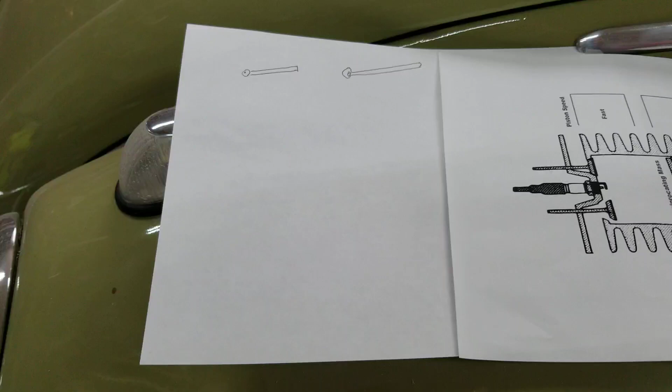All right, so I got a couple of diagrams here to help me explain some of this stuff. But I figured I'd talk about torque and horsepower and what that kind of means to you, and also how to attain it in your VW engine. You could use this for any engine. I use it in every engine build I've ever done.

And I have all these things in consideration when I'm trying to build an engine. Even the simplest build, if it's anything modified over stock, then I'm always looking at these types of things. So I'm going to start with torque and horsepower.

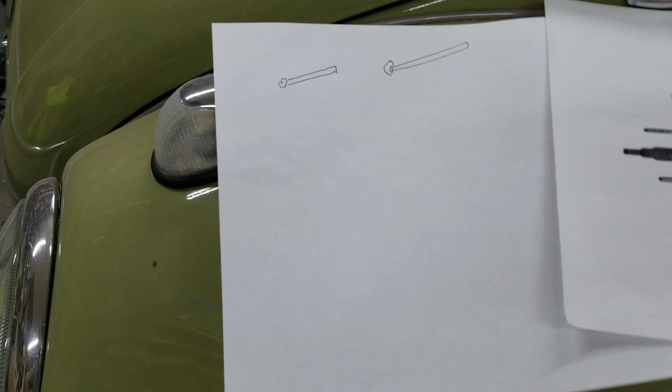And the way you can always think about torque, and the best way to think about it is leverage, is let's say you're loosening a bolt and you have a really small lever like this one here, and it's really hard to loosen the bolt, and then you get a really big lever, a longer one, and it's a lot easier. Torque is kind of like that. Torque is basically developed in exactly that way.

So if you think about it, torque is actually something that is more a manageable power than horsepower. So if you don't build any torque into your engine, you're going to have a car that, as soon as you get to the horsepower range, which is more in the RPMs, it's going to be super powerful and squirrely and all over the place. It's going to be really hard to manage.

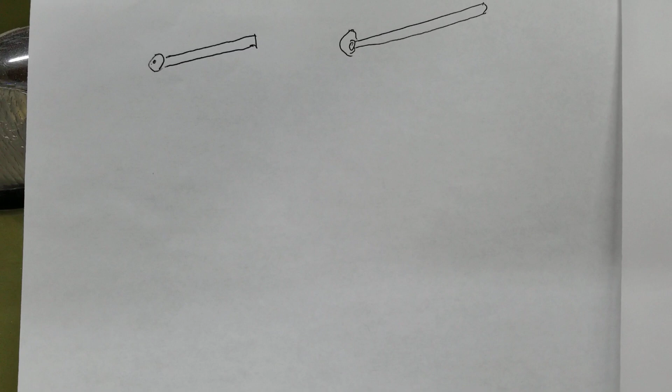So if you think about your torque as being a long wrench, then it's easier to understand that what you're trying to do is get something that's a manageable horsepower, and sometimes that's more your friend for what you're building. In fact, you always want a great deal of torque in your build when you're trying to build something.

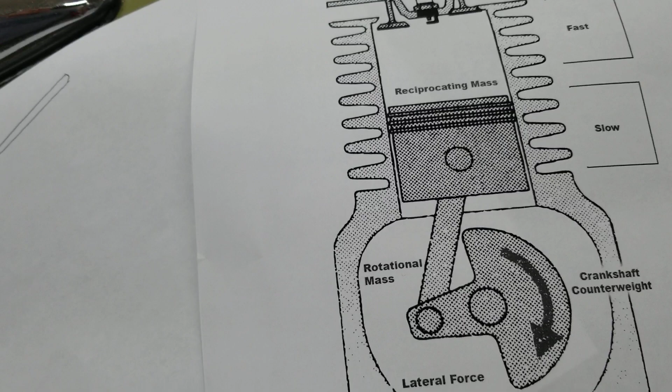So there's several ways to develop torque and horsepower, and we're going to talk about both of them. More torque, if you understand the same concept. So if you have a longer crankshaft, because it has basically more leverage between the center point and the rod, you have more torque. Okay, and another way to get more torque is have more inches.

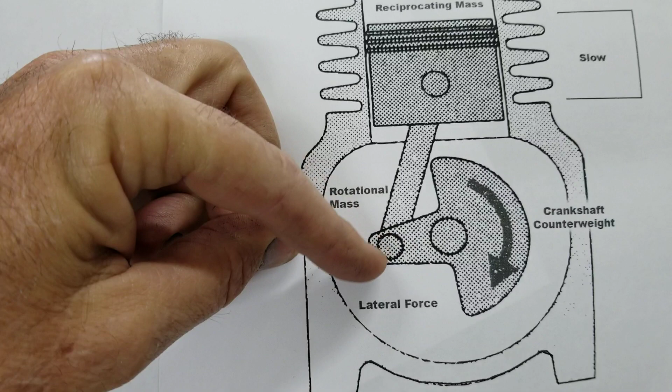So if you have a bigger piston, it's going to push harder on that lever, the crankshaft, and it's going to develop more torque. The ideal torque is going to be the actual crankshaft length, but you can get torque by just going bigger, more inches. So more inches, more cubic centimeters, they develop more torque. That's just the bottom line. More crankshaft length develops more torque.

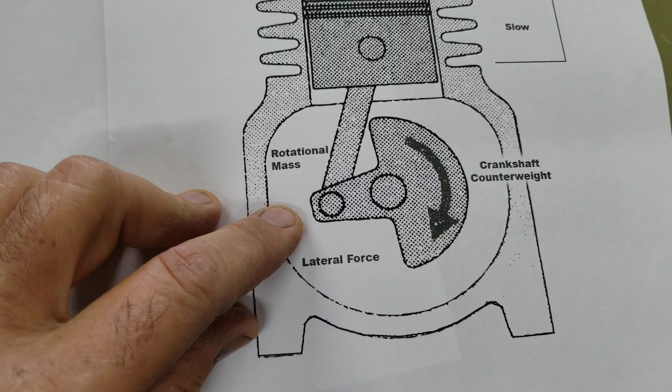So if you put that in Volkswagen terms, if you go with like a 67 or 69 millimeter crank, and then you go to a 78 or 82, you're going to get a lot more torque from going that 82 than you are even just going a larger piston. But to develop more horsepower, if you have a larger piston and a shorter stroke, the top end will develop better top end horsepower.

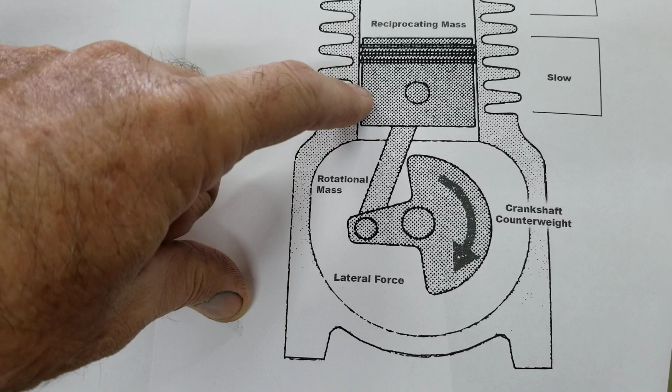So that's called over square and under square of your engine. So if you have a larger piston than your crankshaft distance, then you're going to have a lot of top end horsepower. If you're going to have a really long crankshaft and a really small piston, then you're going to create a lot more torque and less horsepower.

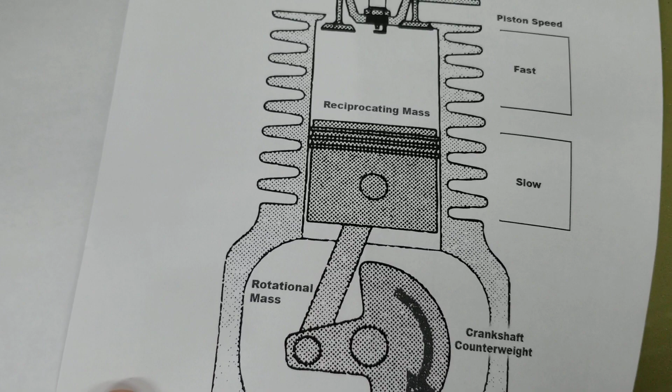So the whole thing is the game in racing, and what guys are always looking at is they're trying to figure out how to get what they want out of their engine. So when they do a run, now they use computers and they're figuring out, okay, we need more torque because we need more manageable power when we first start off, or we need more RPM at the end, so we got to give up some of our torque somewhere. Usually that's what you have to do.

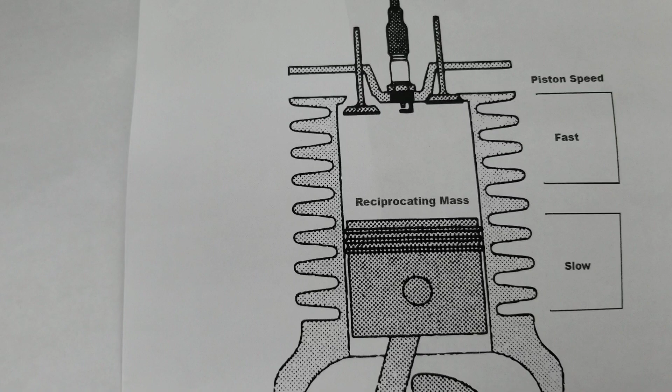You have to give up something to get something else, and it's a game. So that's kind of how you should be figuring out your engine build whenever you're building your engine.

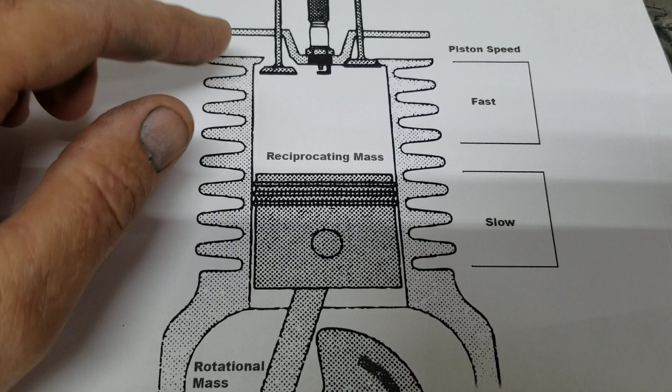So other things that can contribute to more horsepower and torque are the valve sizes. So if you have a larger valve and the air is able to escape in the exhaust side faster, or you're able to get more air and fuel mixture in and it's able to pop and give it more downforce, that can give you a little bit more torque, but more on the horsepower end. So when you're putting big valves in your engine, usually the biggest benefit is going to be more horsepower than torque.

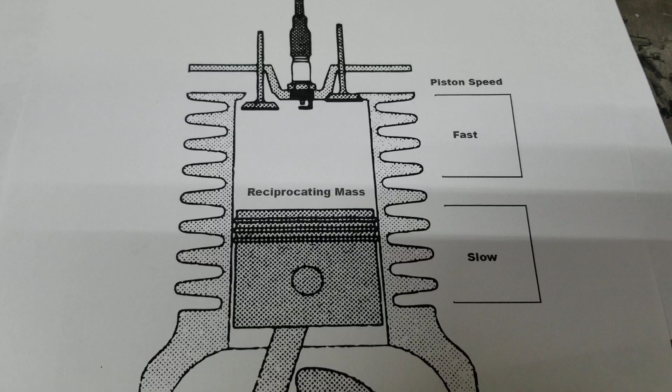And that can be really your friend, because, let's put that in driving terms in your car. Your Volkswagen can be going down the road, and let's say you're at 2,800 RPMs, and you want to increase your velocity from 2,800 RPMs to 3,000 to pass someone on the freeway, or from 3,000 to 4,000 RPMs, depending on how you have your engine set up.

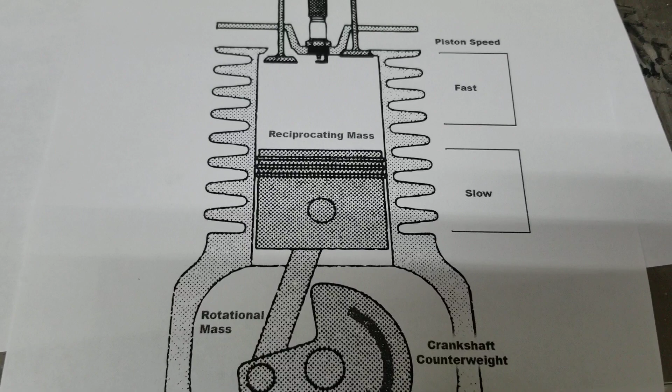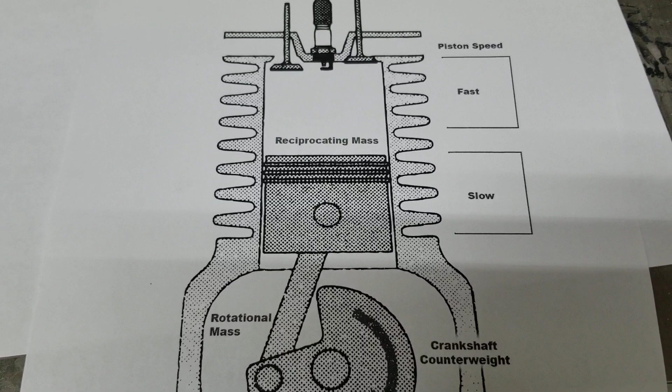You want a little bit more horsepower, and you could use some more torque to do so depending on the weight of the vehicle. So having big valves can give you that type of horsepower when you need it, and that can work out good for you. So let's say this is your carburetor. I know it's terrible. I just threw it on here just for fun.

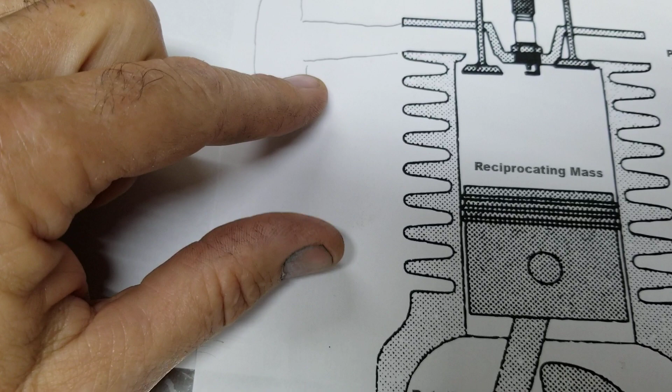The longer distance you have between your intake valve and your carburetor, so if you have a really, really long intake runner, it's going to give you more torque. Now, some people go, oh, well, that's not true. It's absolutely true. This is done in racing all the time. So the longer the intake runner, the more torque you create.

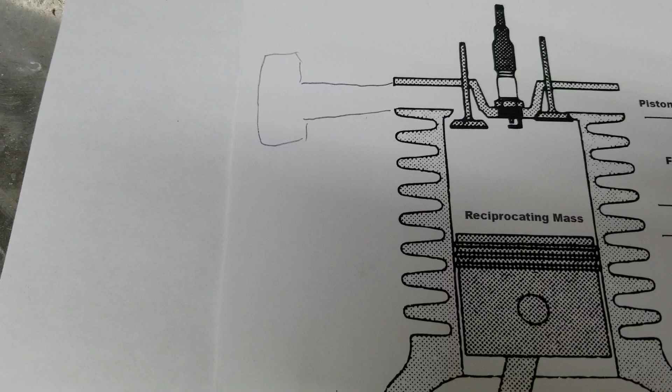So that's why I kind of freak out when guys put dual carbs with really short intake runners on a bus. It's like, yeah, okay, you're going to get more top end, but you're losing some of the torque you're trying to increase. So the longer the intake runner, the more torque you have. The shorter the intake runner, the more top end you create. So those are things to keep in mind in figuring out your engine.

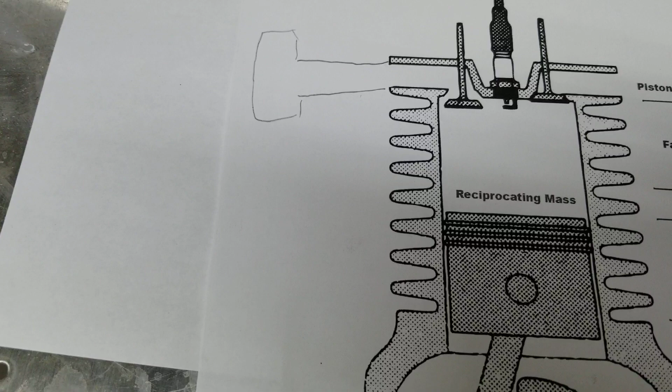This is why on V8s they have what they call a Torker manifold. It's a little taller because it has longer intake runners. And they have those big, long tunnel ram ones, because the straighter the intake runner, the more top end you get. In a Volkswagen, you're always going to have rattlesnake intake runners if you go really long, so you lose a little bit on the top end. These are things you want to take into consideration when you're doing your build and figuring out what you're trying to do with your engine.

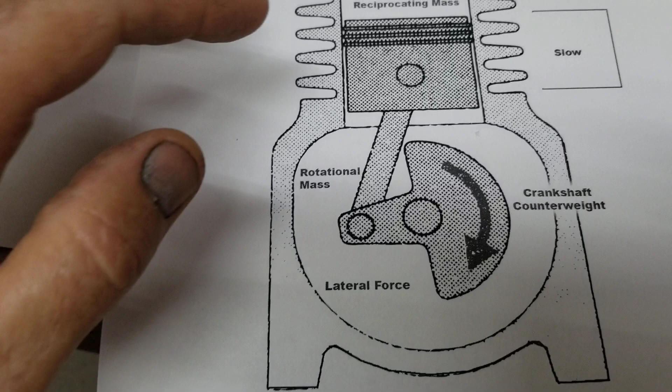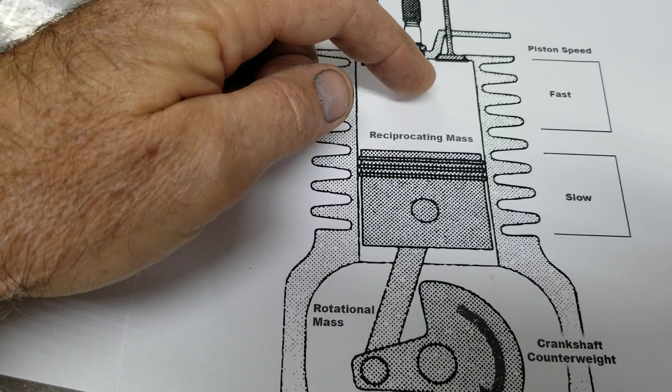Now, another thing that creates more torque is a higher compression ratio. A higher compression ratio gives you more standing torque, because the combustion pressure is higher, which gives you more downforce on the piston. Same thing with a turbocharger, or even nitrous: higher pressure in your combustion area gives you more combustion pressure. But there's also a double-edged sword with detonation and other things. So you have to manage that and figure out how much detonation you can take, if any. In fact, none in a VW.

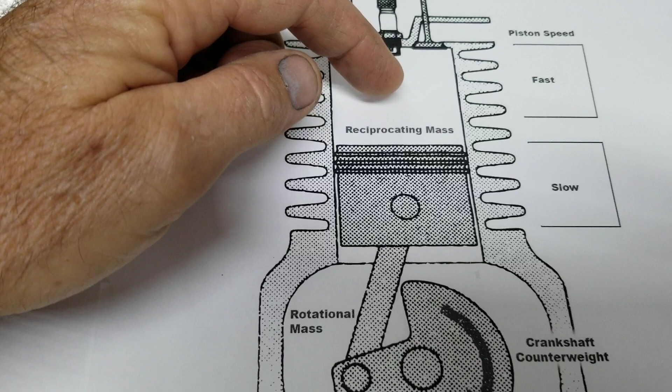So that's something else you can take into consideration, having a higher compression ratio, as long as the engine doesn't get too hot. Because when you go to a higher compression ratio, you end up increasing your combustion temperature, and combustion temperature is your enemy when it comes to detonation. So you have to keep that managed just right.

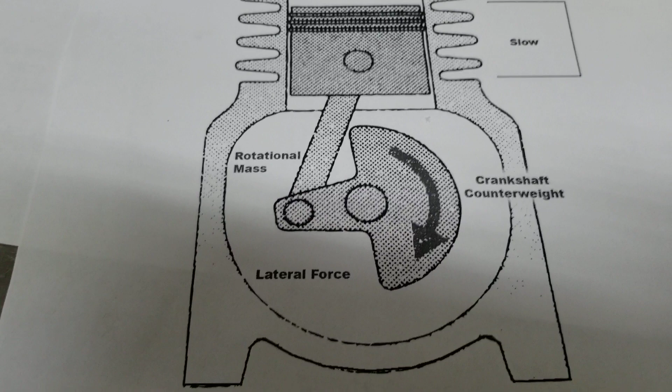Now, the reason people go with counterweighted crankshafts is because you're managing the torque, so your torque isn't able to break things as easily. A counterweighted crankshaft for that firing time actually helps your engine spin better, gives it more reliability, and it won't break as easily.

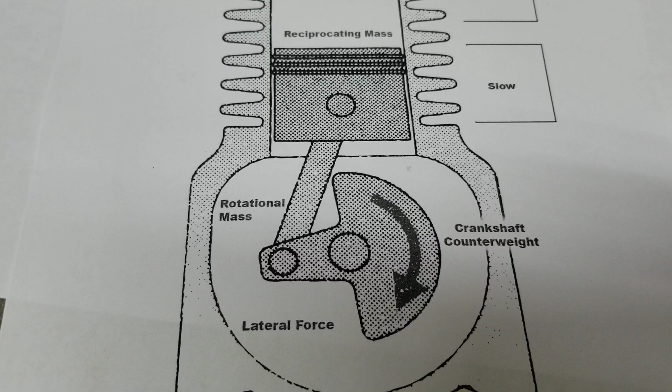The thing with going too much on the torque side is, if you're using that torque, like punching it all the time and dropping the clutch, then your transmission is going to break very quickly. Then you have to go with a much bigger one, for much more money. You can spend as much money on your transmission as you do on your engine. So keep that in mind. If you're going to do any upgrades, especially to a 2-liter, and you're going to be using that power, you better have a transmission that backs that up.

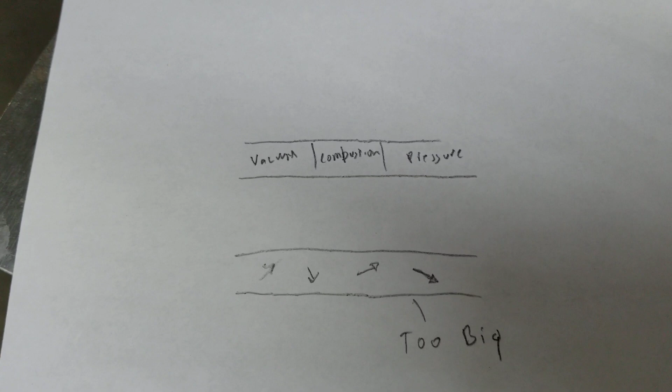Now, when it comes to exhaust, it can really get complicated, and some of the new massive horsepower cars that are engineered today have come out that way because of computer systems and stuff like that.

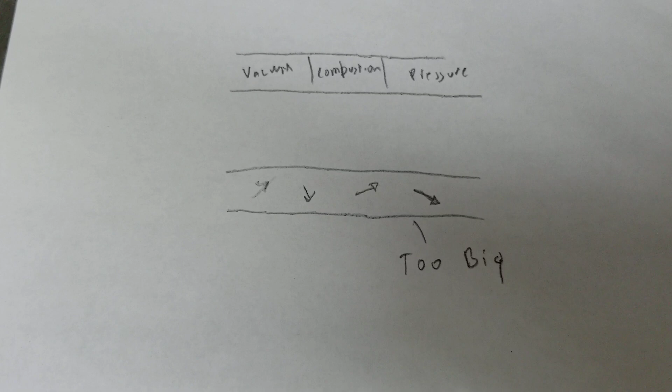They've actually figured out a lot of this stuff down to, you really need to be able to do this on a computer. There's no way. You have to have formulas and timing and length. You have to be really, really knowledgeable, but I'm going to give you the basics. I'm not really that versed on it, but I'm going to give you the basics so you can understand how an exhaust system can either benefit you or hurt you.

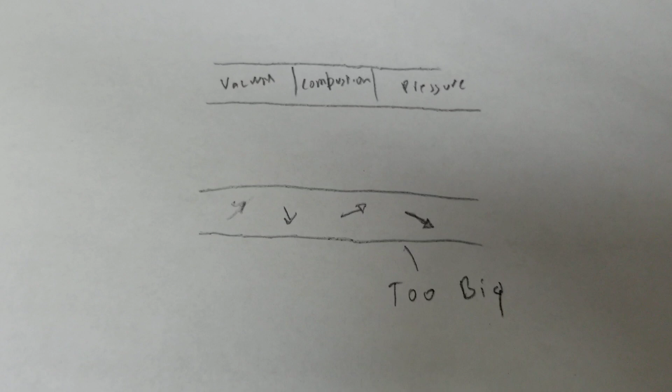And it's a little bit of guesswork because I don't know if anybody has really engineered a Volkswagen exhaust. There's the merge exhaust, which is really good because it's going to do something else, and I'm going to explain that in another part of this. But here's the basics, okay?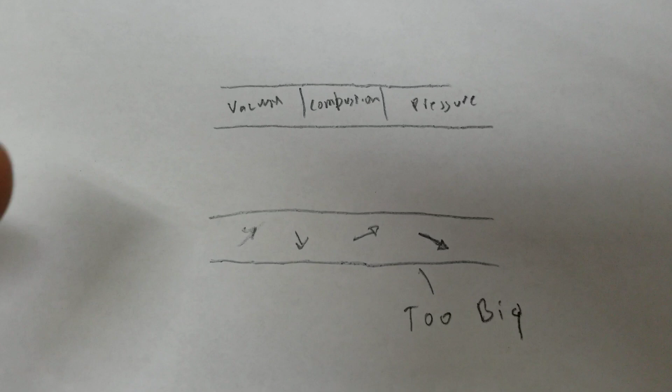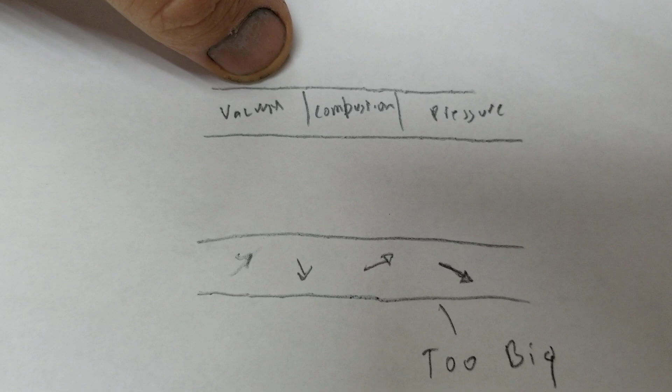So whenever you have, and I don't know if it's exactly a vacuum, but there is pressure on this side. So when you have your combustion going through your exhaust, you have your pressure on this side of the exhaust, and you have your vacuum on the other side of the exhaust. So just keep that in mind, that as your exhaust goes through, there's pulses going through that exhaust, and if you can time things just right, you can use this vacuum side or low pressure side to actually suck exhaust out of another tube. And this is what they've mastered in some of the new cars.

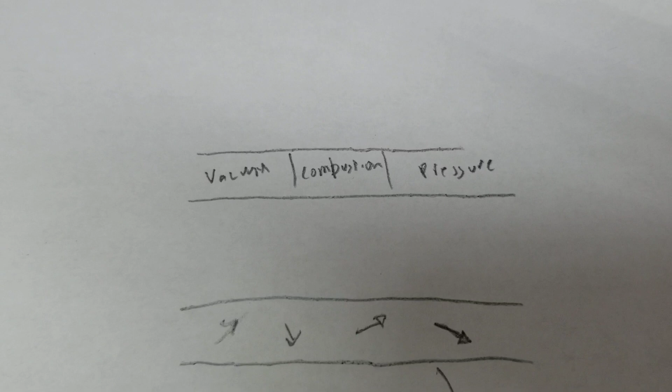They've got it so it almost creates a turbo effect. So your exhaust gases can release through your exhaust valve as it's open, really quickly and easily, and that can give you a lot more horsepower for your buck.

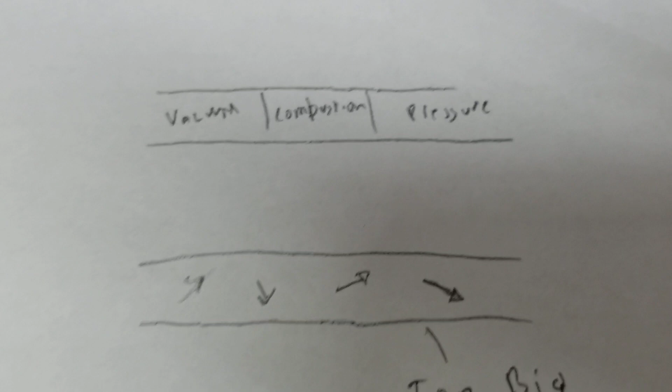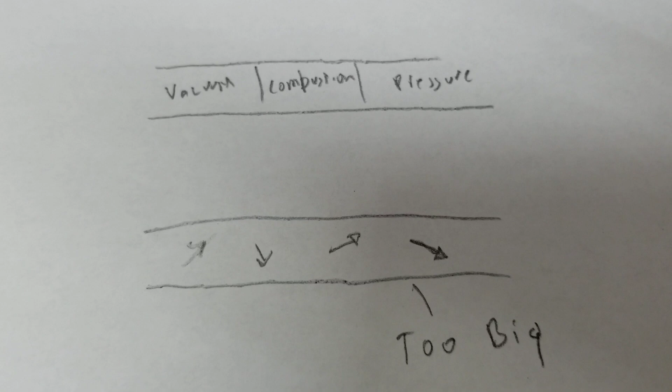But they were just starting to figure this out in the 80s, and I remember guys at the circle track, you could hear their cars, the way they sounded was so much more like the newer cars are, because they had these exhaust systems where they had figured out how to actually use that vacuum and pressure and combustion, and have that combustion be productive to pull the other cylinders. So as it would go through the exhaust system, the next cylinder would be right behind it, and it would actually create a flow effect that gave it even more top end, and that affects your horsepower mostly.

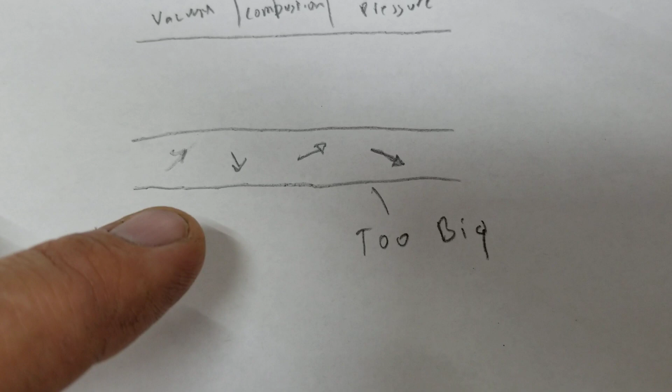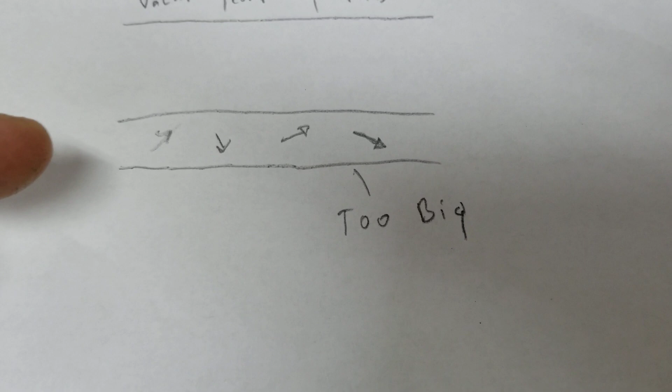But some guys will go way too big on their exhaust, and there's a formula on this stuff, and I don't know it, but there's a formula of too big and too small. And a lot of times the car manufacturers have already done their homework. So sometimes their exhaust system is actually better than one you put on it. Because if you go too big, you're trying to manage the velocity of the exhaust, okay? Get it to flow properly through the exhaust system.

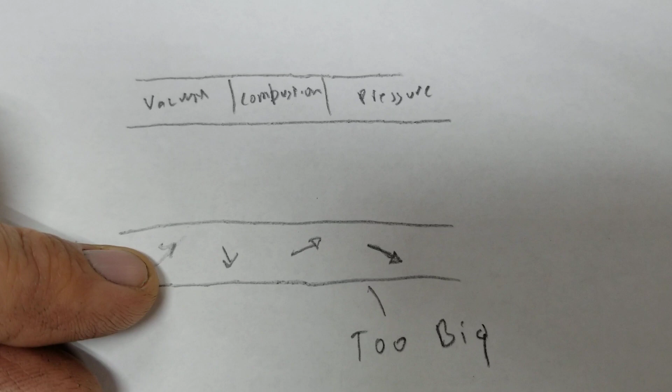And if you go too big, it becomes turbulent in the exhaust. So your air goes through there and does willy-nilly stuff, and it doesn't flow as good, so you're not utilizing this vacuum. You're actually losing the vacuum side of it, because of this turbulence through your exhaust.

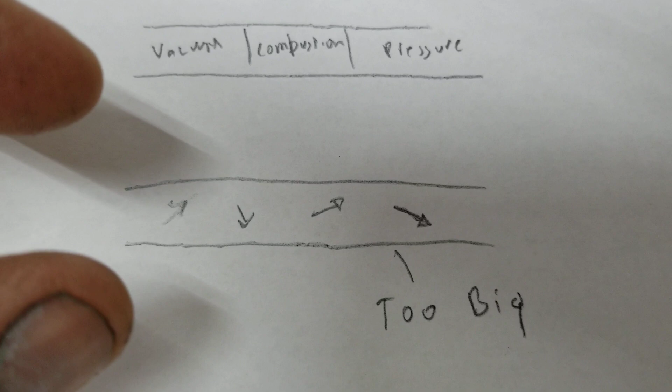So on my Turbo Rabbit, I have a really big exhaust. Where I lose my horsepower is a little bit in the bottom end, but it's a diesel, so it's got so much torque that it doesn't really matter. But at the top end, this stops happening, and I increase my flow. So on a turbo car, a lot of times having a really big exhaust will be beneficial, especially for the top end horsepower. But you might have a problem with lower end horsepower because it's turbulent inside there.

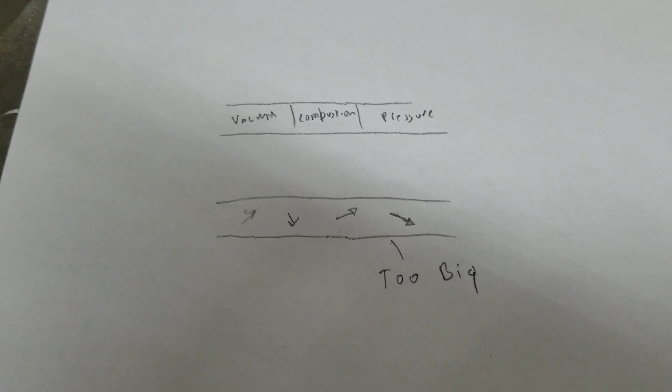So I'm just giving you a heads up on how to figure that out on your own. Sometimes going too big on your exhaust actually will hurt you because of the turbulence. It's not necessarily because a larger exhaust has more torque or less torque. It's actually the turbulence that's created, and the inability of the vacuum side of the exhaust to actually pull the exhaust through the car.

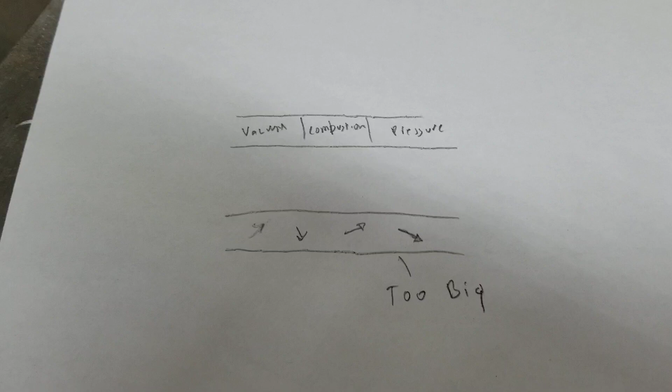Now, these guys who run dragsters and stuff like that, they're not as worried about this. This is more of a drivability thing through the whole power range, because the first thing they do is take the engine up to the optimum power range, and then that's where they keep it all the way down the track.

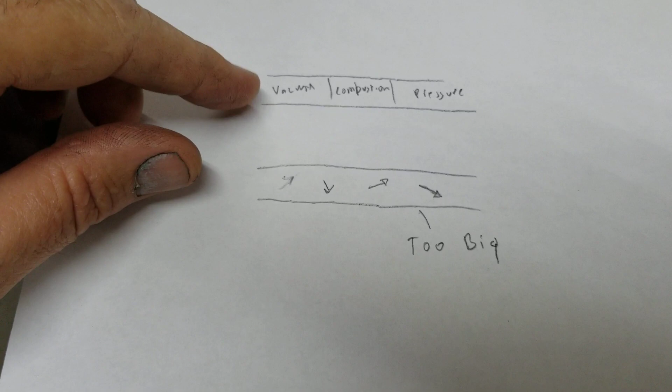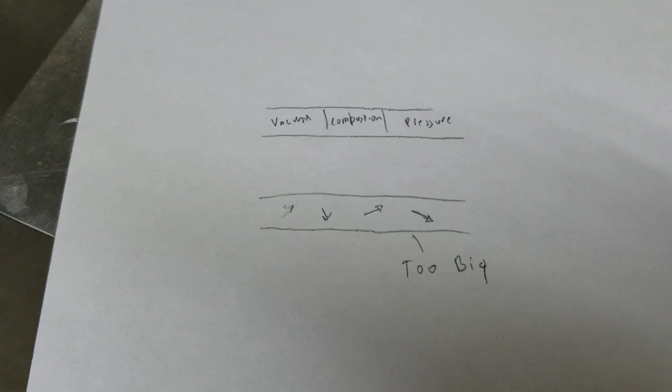So on a dragster they have really short exhaust, but as a drivability thing, you're constantly trying to figure out this: not to be too big, not to be too small, where you lose all your horsepower. Because it's not really back pressure, but you have more pressure and more velocity going through here, and sometimes, like I said, if you don't have the proper formula figured out, you can do that.

And I'm going to show you real quick about the merge type exhaust, how they work. So somebody's done some homework on these, and I don't know exactly how much of it they did, but I remember when they came out with the merge exhaust for Volkswagen, and those were on the sidewinders and stuff like that, I think.

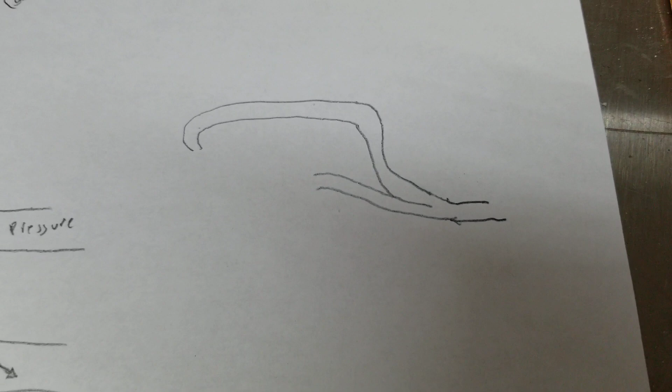But this type of a muffler system actually works really good, because as the exhaust goes through the Venturi, this one is on the pressure side, and they have it timed so that this one's on the pressure side back here, and this side of it's on the vacuum. So between the two pressures, there's a vacuum, and it actually helps suck the next cylinder through the exhaust system. And that's how all of the new cars' exhaust systems are actually created.

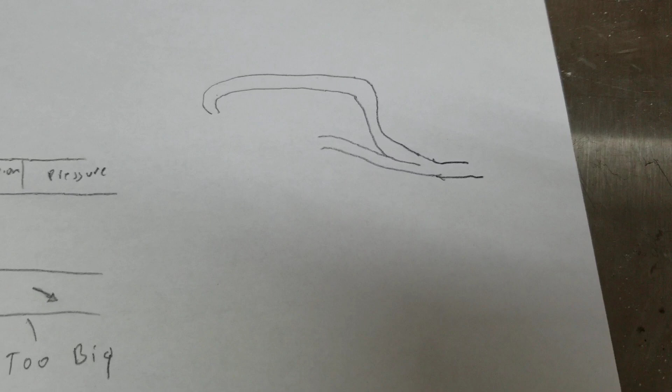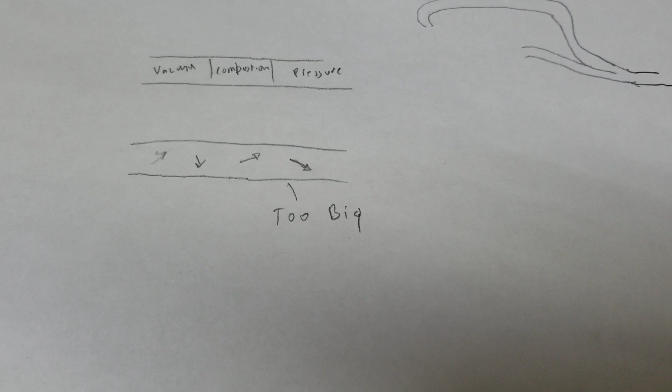And that's why they sound so wickedly high pitched, and it's actually flowing through the system better, because they're using the pressure and vacuum, low pressure, high pressure, however you want to say it. And I say vacuum because it's easier to understand, but I don't know if it's actually a vacuum that's created. I think it's actually lower pressure than this is. But it actually helps suck the exhaust through, almost like a turbocharger does with the intake, pushing pressure into it, utilizing that. So that's what I kind of get.

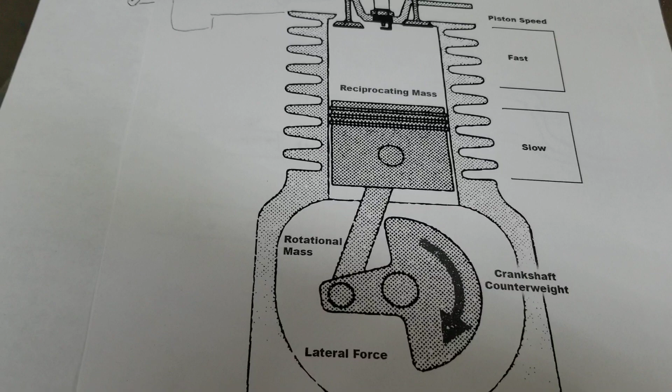I kind of don't understand why a lot of guys go, "Hey man, I'm just gonna build 1914 because it's easy. I just get the 94s, and I slip them in my cylinders, because I only got to pay for one thing." And then I go, well, wait a minute, did you put a stroker crank in? "Oh yeah, man, I put a counterweighted crank in." Well, I was like, dude, if you want counterweighted, why didn't you just go stroker?

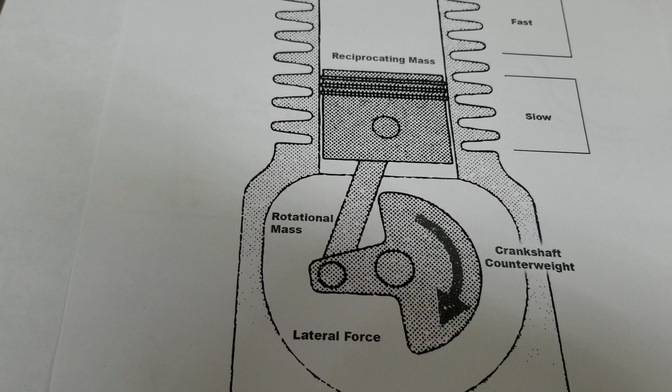If you're going to go a little bit more, then get off those 94s, because the 94s put your studs so close to your cases, unless you're going aluminum. To me, it's kind of counterproductive, because you lose strength. You're putting your case studs right next to your cylinder. In fact, on some of them you can see the case saver, because it's all the way through. And to me, you're kind of losing the ability.

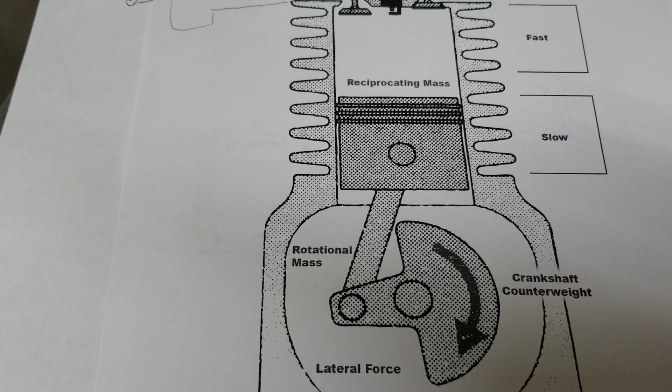So myself, I'll use the 90.5 as about the biggest one, or you can go a thick wall 92. And what you have to do is take your barrels and machine those down on the top and bottom, or on the bottom at least, so they'll go into your cylinder block.

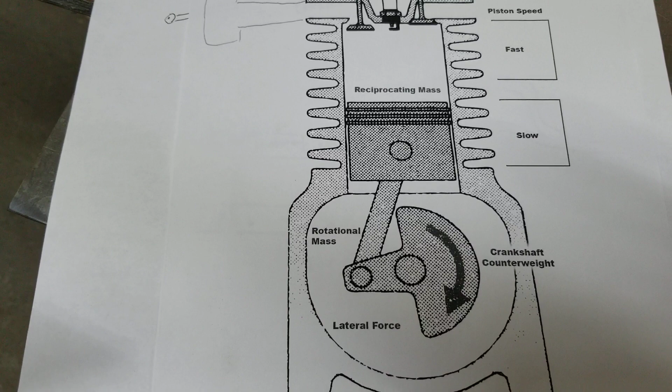So basically, what you end up with is the same bore size in your cylinder block as you do with the 90.5, but you have a thicker wall on the part where the piston's moving up and down, and the top where it goes into the head, and you'll have the same size as a 94 drilled into your heads. So I don't know if you can understand what I'm saying. So that's about the biggest I'll go, is 92.

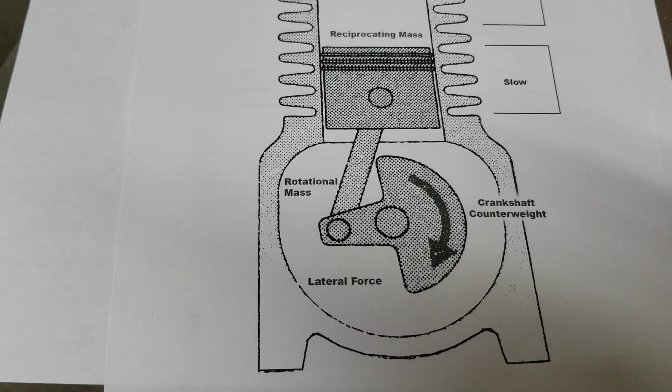The 94s, like I said, you can do it. It depends on the money you want to spend. I think if you're going to go 94, you should go aluminum on your block. That's just my opinion. A lot of guys will talk against that, say, no, I've done it all day long, man, it works fine. Hey, whatever. But if you're thinking about long term and want to drive it for any period of time, it might be a good idea to at least consider that.

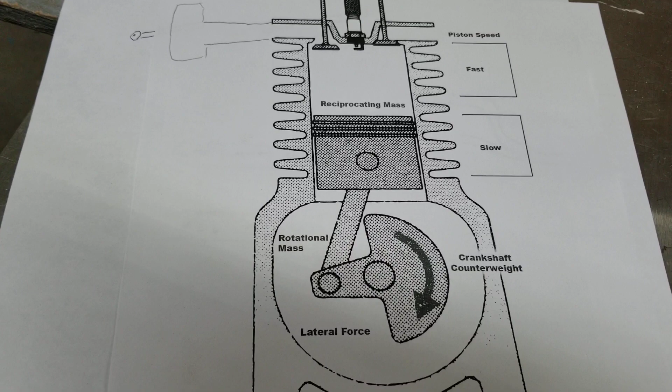So anyway, that's a little bit about your engine, all the different types of things that you can think about. Oh, except for one thing I need to just go over, is camshafts. Camshafts can make all the difference in the world. All these formulas right here, all this different stuff about torque and horsepower can be totally changed by camshaft. And so if you have a bigger cam, bigger duration, bigger lift, you need to make sure that it works with what you're trying to do.

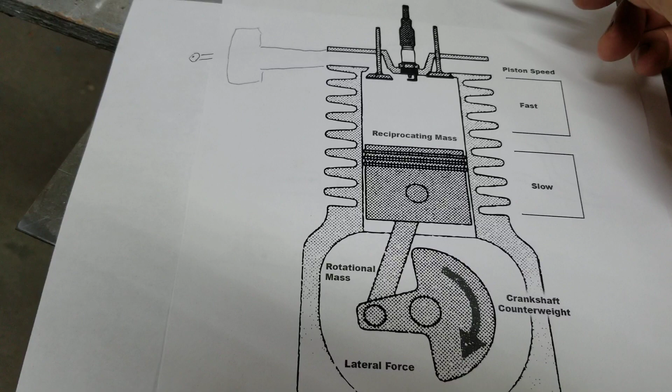So I like myself a high lift, short duration cam. And like I always say, Engle 110. I don't really like Engle cams, because I believe, if I remember right, they're like 300 lift and then 300 duration. I'm going to say that's just a square cam. I don't really like square cams. I like, say, mine's like a 268 duration, and I think it's a 340 lift or something like that.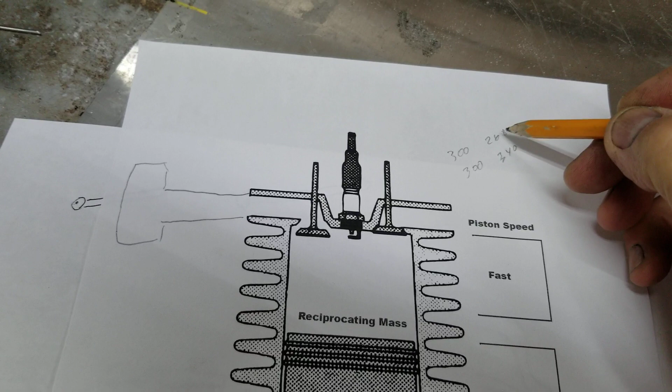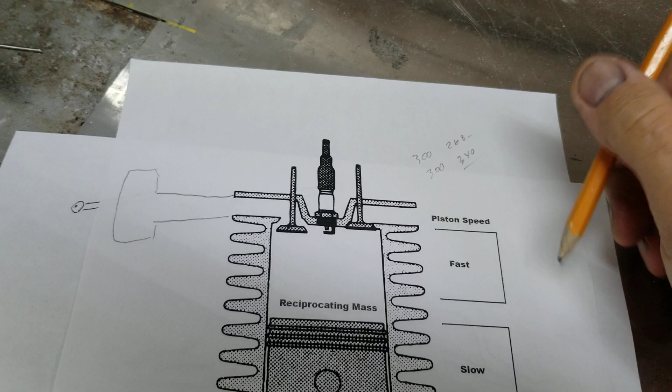So I prefer high lift, 268 lift, 340 is the duration. Sorry, I got that backwards. So 340 lift, 268 duration. I like something like that myself because it's kind of a mid-range cam. Or if I go bigger, then I'll go for a higher lift and a little bit higher duration and that sort of thing, because it gives you more of a power curve where I like my power, which is between 3 and 6,000 RPMs.

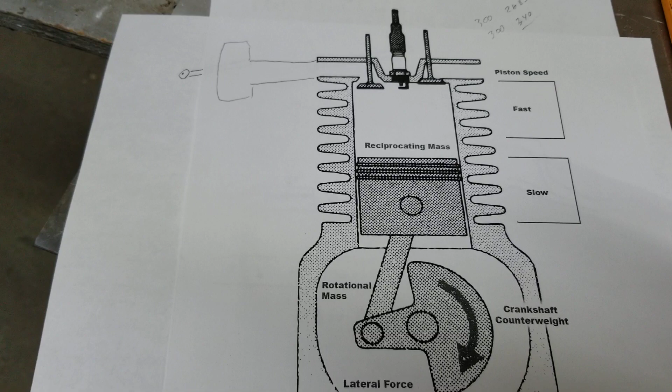And I don't like it all at the top end, which if you get too much duration, it kind of gives you more top end power. You get more horsepower out of it, but you don't get as much torque. So you kind of lose the bottom end a little bit, but those types of things, you can figure out what you want to do by the camshaft. And that's another really complicated thing. I can't really get into all of the reasons why that is and how it works, because it's too complicated, just like the exhaust. But I kind of give you a heads up that all that matters.

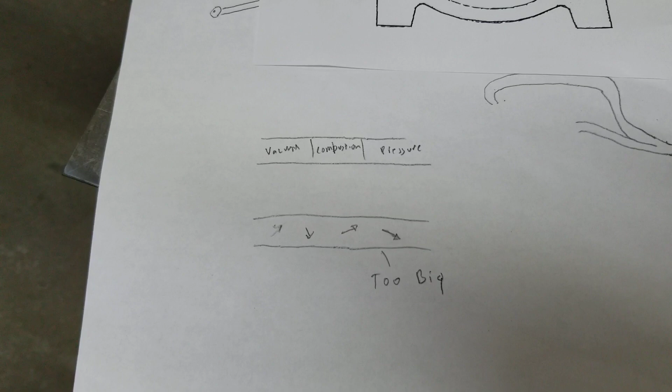So, that's what racing is all about, where they're just trying to figure out the formulas, just a little tiny change, and that little tiny change makes all the difference in the world when it comes to the end of the track and drivability and all that stuff. So, those are some of the things for food for thought. And if you utilize those things when you're building your engine, it kind of helps you figure out what you're doing. And you're not just buying a bunch of parts and throwing them all in your car and going, oh, wow, I made it go fast. You're trying to figure out what you want to do.

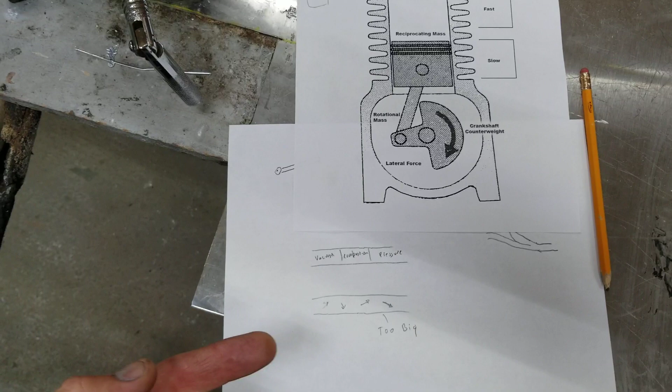Because right now I might end up building a motor for the camper because the 1600 single is just not enough juice. And all these things here depend on how much money you want to spend. So where am I going to get the biggest bang for my buck? And how am I going to get what I want to accomplish? I'm just going to give you a quick heads up on what I might do, because I got a heavy camper. I don't want to put a heavy duty transmission in it. So I'm not going to put tons of carburetion on it, because that'll bring my horsepower up too high. And with as much torque as I'll have built into it, I'll be breaking stuff. So I don't want to do that.

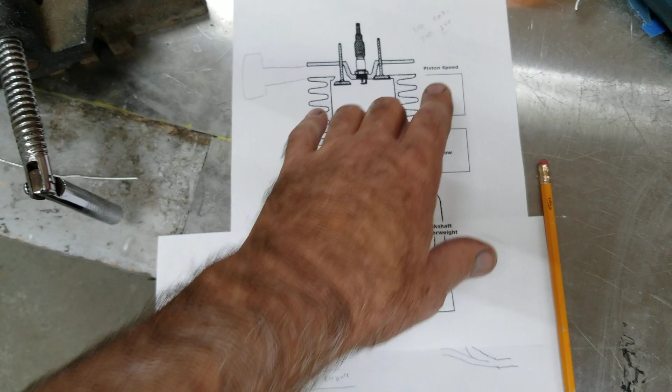So what I'm thinking about doing is I'm going to put in a cam somewhere in this range. I got some numbers I'll probably put up pretty soon, in a video just about cams, the ones that I like. 260, 270 lift, maybe a little higher. I'm not sure, because I got to figure out which motor I want to go with. But I'll probably go with a counterweighted 76. Maybe I'll go 78. Depends on how much work I want to do in the case. I could even go 74, but you got to go A pistons if you do that. 76, you got to go to B pistons. That's kind of where the line is drawn.

And with the 74, you end up with really tall shims on there, so it's kind of funky. There's a little bit of wobble. Nothing you can see, but there could be a little bit of wobble in there. And that vibration could cause your heads to come loose more often. Those are the type of things you've got to think about.

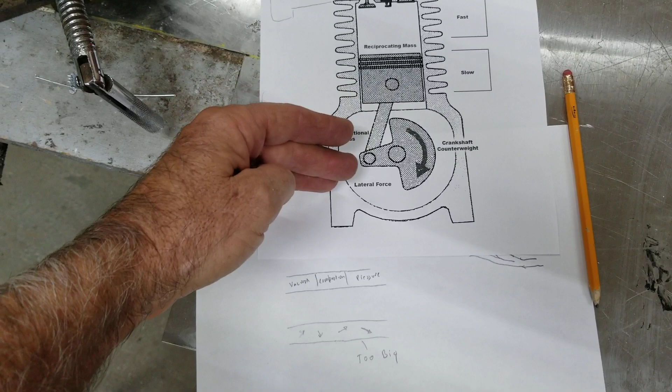And then too much reciprocating motion here creates wear on the magnesium case. So, like I said, if I go any big motor, I would always go aluminum. I'm not going to mess with a mag case, even though they're lighter. I'm not trying to win races. I'm looking for something reliable and strong. So if there's more reciprocating motion, then that's more wear on the case, the fatigue of the case.

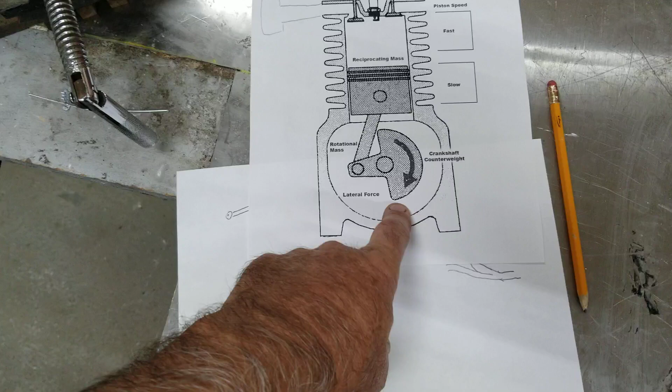So I prefer not going too large on my crank, but I might as well go counterweighted. If I'm going to go counterweighted, I might as well go stroker. That's how I look at it. If you're going to go counterweighted, why not just go with the stroker? So I'll probably do 90.5 by 76 or 78, somewhere in there, which I think 78 by 90.5 is 2007. That's a nice motor.

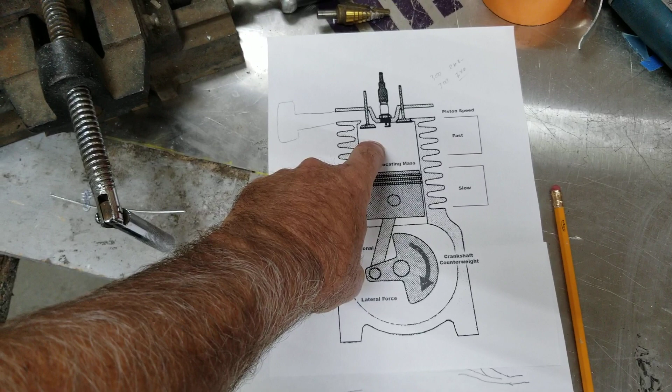And then I'm deciding I might put bigger valve heads in it. I'm not sure yet, but if I don't, I will port them, because if you port them, that increases the velocity going in, which gives you more horsepower, a little bit more torque, but more horsepower. And the reason I want a little more horsepower is because I want passing speed. When my RPMs are above like 2,800 RPMs, I want to have a little bit of juice so I can pass somebody if I need to. So that's what I'm trying to accomplish by having larger valves.

Now, I'm going to run a 2-barrel. I'm going to have a Holley Weber 2-barrel, the old one, not the one from Empi. It's just not the same. I haven't messed with them, but I've been told that they just don't work very good. But the old Holley Webers with the vacuum secondary, I really like those because you're always running on a really small carburetor, so you get decent gas mileage. And when you do open it up, you have 60 CFM total, which is the same as Kadrons.

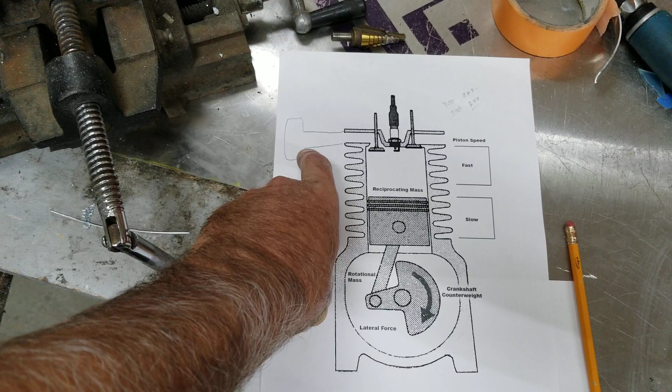I don't have to deal with dual carbs. With the dual carb Kadrons, I have really short intake manifolds. That's not good for my torque, so I want the longer ones to run a 2-barrel. That's just my theory and why I do it. So I'll probably do that, and then I'll figure out a couple other things.

I may end up going with the AA big valve heads because around the spark plugs there's more meat, it's stronger, and I would have big valves, and the big valves will help with that passing power. They won't give me any more torque really, but they'll give me more passing power. So that's kind of what I'm thinking about there. So those are the types of things I'm talking about.

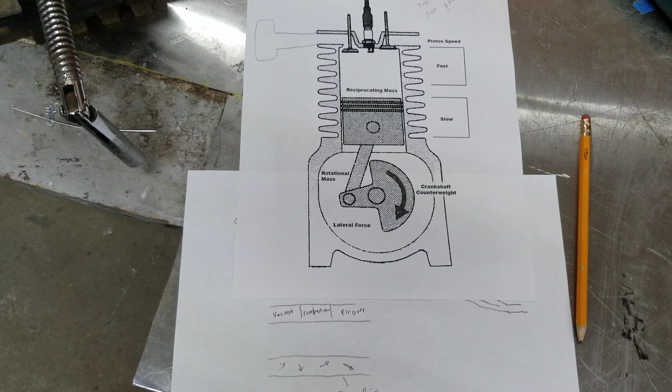When you figure out what you want to do with your engine, try and figure it out by using the methods that I do, which are looking at all the different engineering ideas and figuring out what's working best for what you're trying to accomplish. And if you're trying to win a drag race, I'm not really the guy to ask about that. There's guys that are way beyond me in this. They're changing little tiny stuff, one little tiny thing, then another, and they've got it all in their computers, CB Performance and those guys.

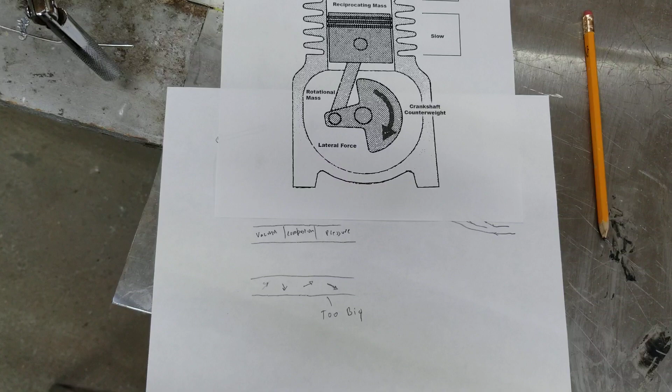Everything's all on a dyno. Darrell Vittone, some of those guys from Tectonics and all that. Everything's running on a dyno. They've got it all figured out. They spend a lot more time on this than I do. But this is just basic knowledge for you guys that are trying to build your own, to get your engine built and figure out what you want to do.